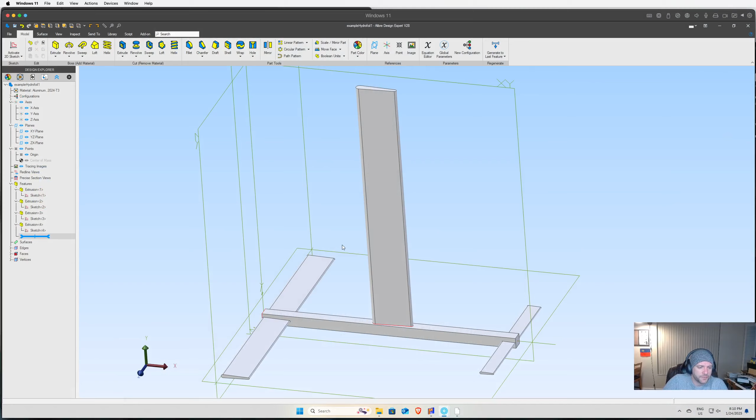All right. So since my last videos, I think I went into a lot of detail of how I would approach calculations. I don't think I want to go through too much detail here, but want to show where I started working with a very simplified hydrofoil. So right here is what I've got. It is incredibly simple geometry. It's a really simple airfoil or hydrofoil for the mast.

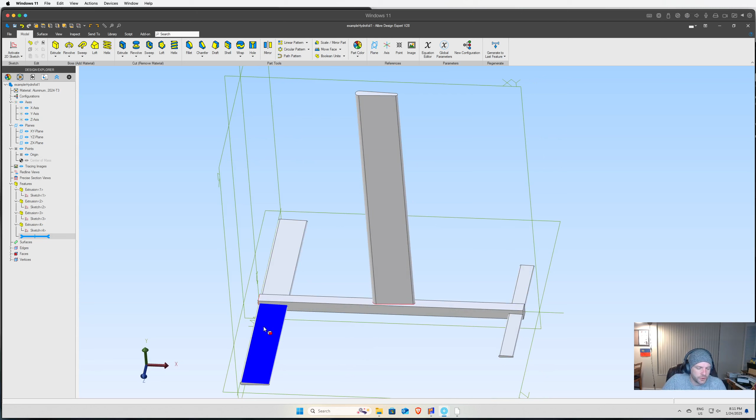3 feet. It's in the dead center of a fuselage, which is also 3 feet long. And wingspan here, we got a meter, and we got roughly half that size here. And this gives you overhead plan area of 1,000 centimeters squared, and this gives you, I think I've set it at 250. And so what I want to do is kind of go over what I explored here.

And so I really started with hand calculations. That's how I like to approach almost any kind of engineering design problem. I want to make sure I understand things. It really helps me get what physically is happening in my head and have some level of expectation of how things are going to behave. And so I put that down in hand calcs.

Then I either see how that works in a finite element program or whatever model I have available. Sometimes I have something built available, but oftentimes in big design problems, it's mostly some kind of computer simulation. But to keep things easy on myself without going to the difficulties of composites and everything so far, I kind of want to get a bigger picture of things. I did assume that this hydrofoil is solid aluminum, the fuselage, the wings, the mast, everything.

Any kind of bending mode I looked at. So I looked at bending modes with beams. I looked at torsional modes of beams, and I also looked at shear modes, but shear didn't seem to matter too much for this problem. All done with aluminum and all analyzed with rectangular shapes that are the average thickness of the airfoil I had, or hydrofoil. I assume it's fixed at the board. I assume that any vibration, there's no added mass from water. I can account for that later.

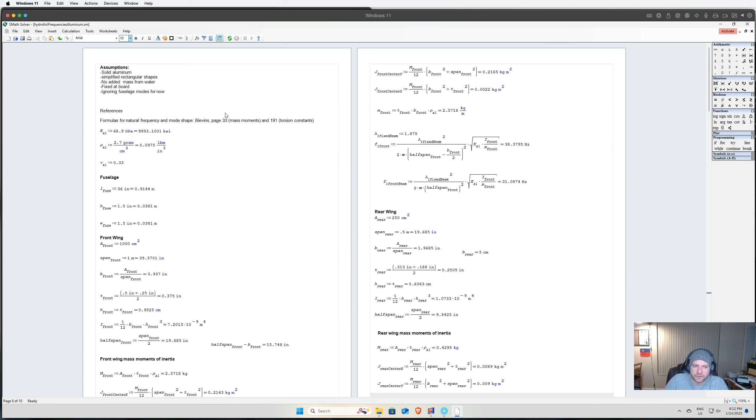And I didn't really look at the fuselage modes too much. I did kind of play around to see if they have an effect, but it seemed to matter more for higher modes. But as you can see, a lot of hand calculations. And what I found out was there are a lot of combined modes for various things. And so I'll go over the models I created. So one is pretty simplified. It's like a tet mesh model.

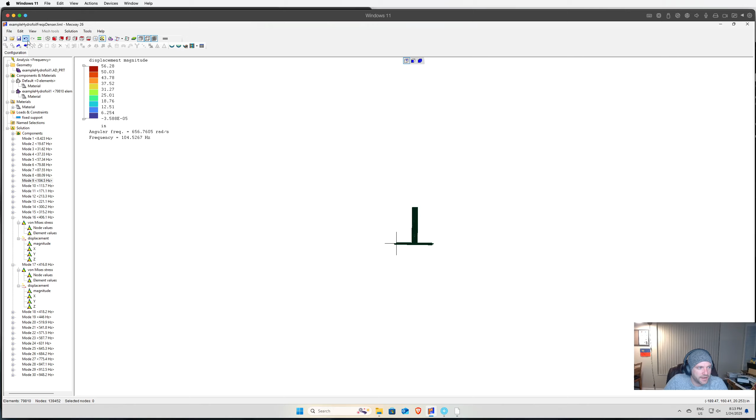It does have the airfoils in there, and sorry I'm zooming it around, but it does have the hydrofoil shape in there that I modeled in CAD. I don't think that's a really good hydrofoil shape, but it was simple to model. I just wanted to get something going, and I looked mainly at these modal shapes. And what you'll see is that this first lowest mode, given the dimensions I had, this is roughly 3/4 of an inch wide at the thickest. I think it's half an inch back here, and so I use the average of those two as the dimension.

Actually, I can measure here with this program. Let me do that real quick to make sure I'm not a liar. I like to make sure I'm correct. So measure from here to here. Actually, so that's an inch across, and so the average is actually 3/4. So it's an inch across. It's half an inch in the back, and so the beam I used was just a rectangular beam to approximate the mode of this.

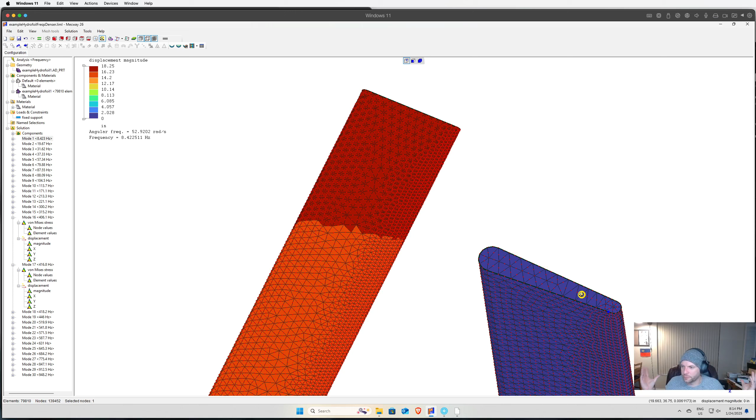But so I did this FEM model or finite element model, and I got this bending mode. You can see here. So that's the first mode I hit, and by hand, this is the easiest one to calculate. I did have to play with some of the inputs a bit. Anytime you do vibration, you do end up needing combined modes, and it's best to not have to do any kind of fudge factors. I don't like fudge factors. It means you don't really know what's going on.

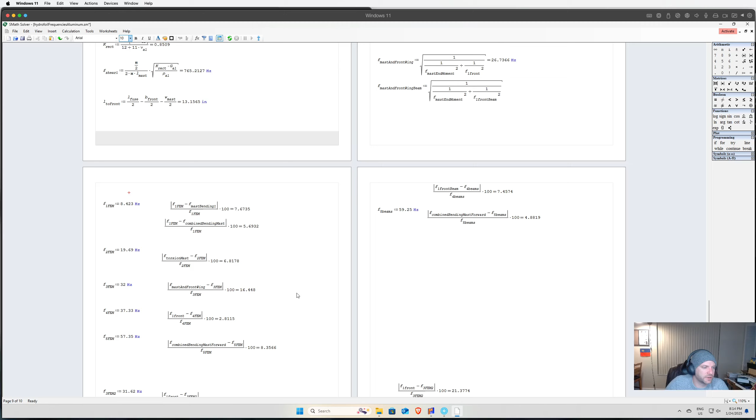But so FEM says 8.423. I think that's what I put in here. 8.423. By hand, oops, sorry, wrong program. By hand, I got a little bit different than that. So the mast bending, what did I get?

9 hertz, like almost 9.1 hertz. And so that's within 8%. And what I also combined there was I combined another mode. Let's see, what was the mode I combined? Combined bending mast. Ugh, I'm having a hard time talking for some reason tonight. There we go, combined bending mast.

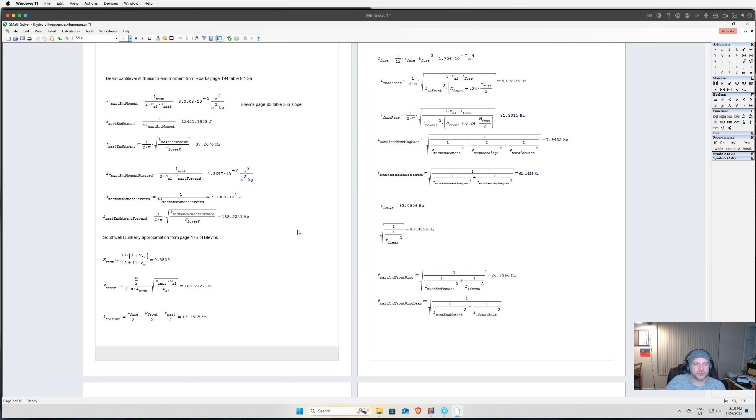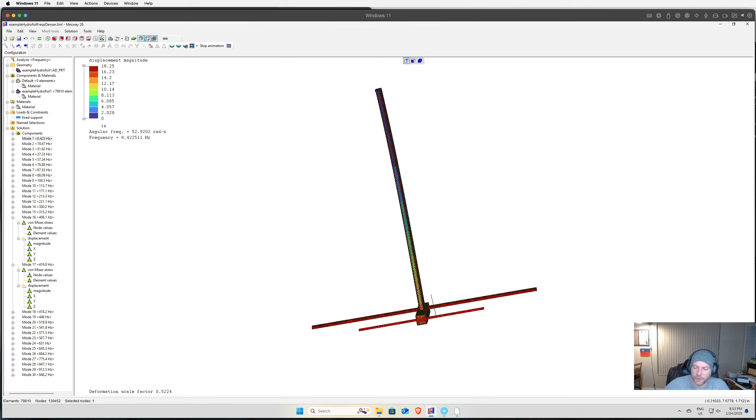So it's actually a combination of not only a bending mode, but a torsional mode or a twisting mode of the shape. So not only do we get the pure bending mode, but there's also this rotation and torquing of this whole moment of inertia of that fuselage and the wings combined. So the mass and everything is causing that mode to drop. And so when I combine those things, so not only the torsional mode, combined bending mast, I combined the mast end moment, which is what that is.

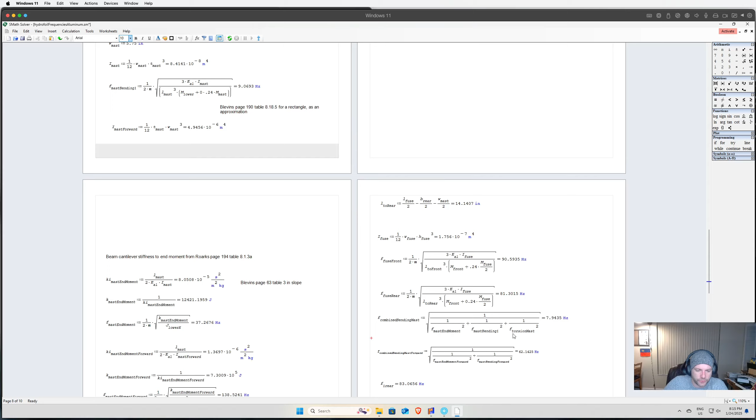I also looked at a slight torsional mode of the mast because it's not a clean side to side shape. You know, if you look at it, there's a slight, let me get dead on top. Let's see, which view do we have? You can see that the front wing has got this slight torsional twist mode to it.

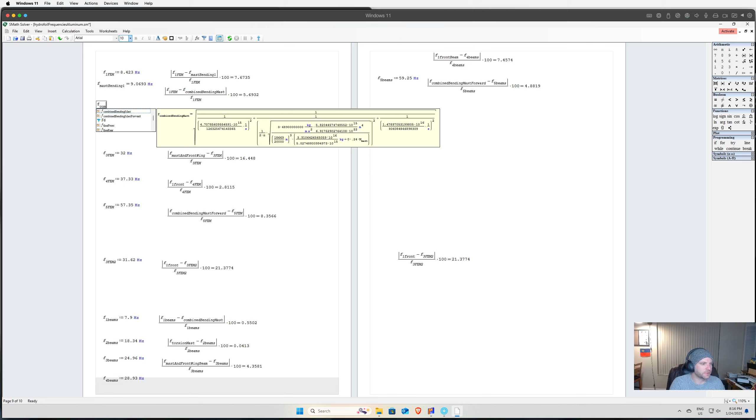So I combined all those modes by hand, and I got within 5.6%, 5.5%, something like that. I say that's pretty good, considering the simplifications I made, just trying to see what was going on. So I got 7.9 hertz by hand. The model was 8.4 hertz. I say that's pretty good.

Second mode, I looked at this one here. So this is a torsion of the mast itself. So this is a lot of just the mast twisting. And I got 19.67 hertz in my finite element model. 19.67, 19.69, depending on the, I was playing with the mesh density a little bit. And by hand I got within 7% of that.

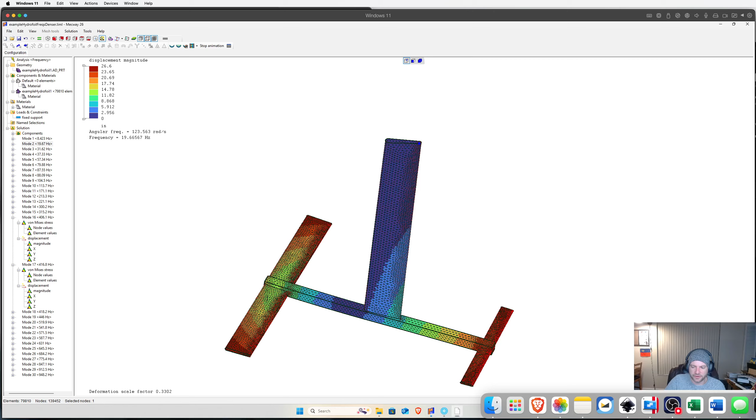So that's pretty good. And the third one, I think, that showed the flapping of the wings, there we go. So there's this flapping of the wings mode, or twisting of the mast itself with the wings. And I don't think this is necessarily one of the first modes you see on a real hydrofoil.

I think we are seeing this because this is a very simplified model. We have this thick piece of aluminum going all the way out for a meter. It's not tapering down, so you have a lot of mass out here, so it's actually causing the fuselage to twist around. And so it's a simplified model. I'm just trying to understand what's going on here. So it's really the combination of the modes of the mast and the front wing wanting to bend together.

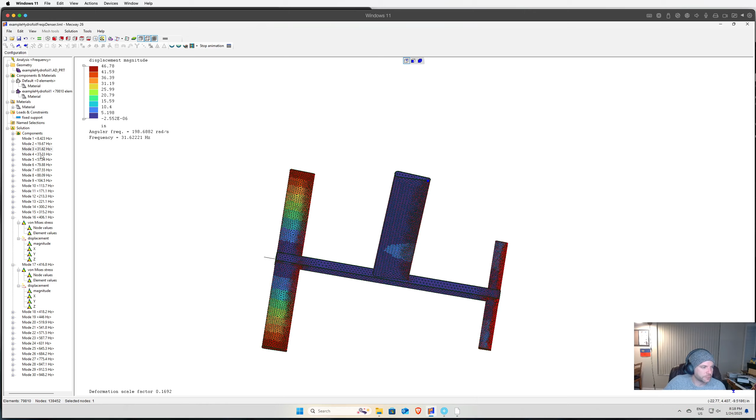And then a little bit of a mode after that is actually more of a pure wing flapping mode, where you get this wing doing this flapping motion. Let's see if I can get a dead-on view here just a little bit.

I like this program. It wasn't that expensive. It's just the navigation and the scrolling for Zoom isn't that great.

But yeah, the other mode is almost a pure wing flapping. So that's 37.3 hertz. And I got by hand within 3% of that. I would say that's pretty good.

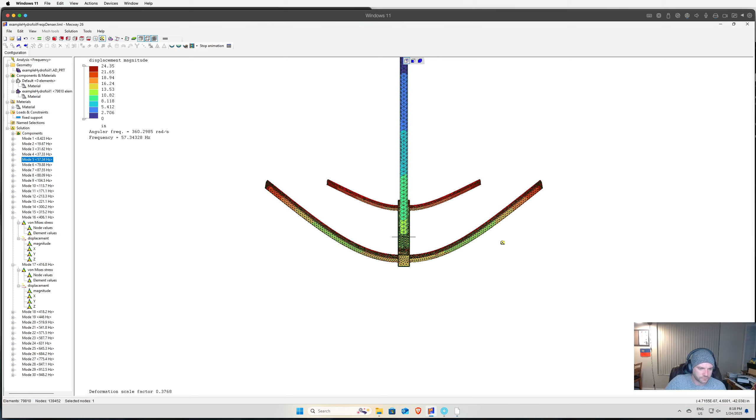And the last one I really bothered with was the fifth mode, where you're starting to get these higher modes where the mast is actually combining this motion with the wings not participating as much. You notice as the mast goes forward, the tips will kind of want to stay where they are, and so you get a rear wing flapping.

You get the mast bending forward, and when I calculate by hand, when I combine these things, I got within like 8.5%. If you look at combining these modes, I say that's pretty good.

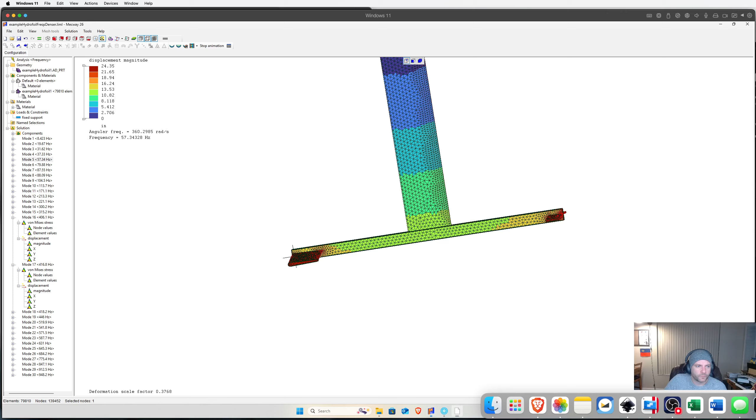Another thing that I did that was, I think, helpful was this model right here. I took a completely stick model of them, and I really like making stick models, and I found out I could actually do it with this program.

I've done it a lot in ANSYS and Abaqus—actually more in Abaqus, but also in Nastran when I was working in the aerospace industry. There are a lot of stick models like this built, where we actually built all the models by hand. So what I did was give this pure rectangular beam properties for the model.

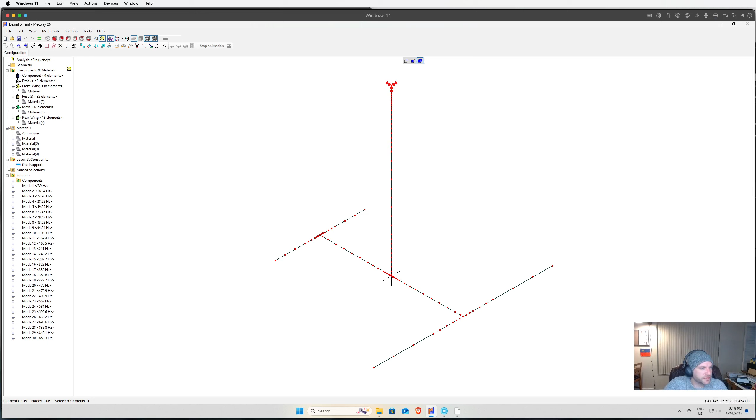Let me see if I can show. There we go—these are the actual simulated shapes. You'll see these are pure rectangles simulating what's going on. They have no airfoil shape whatsoever; they're just the average thickness of the airfoils.

And what that ends up with is, because the real model—oops, let me turn that back off—this connection point at the front wing is dead center of that fuselage. So I did not account for the fact that when you join this right here, the fuselage doesn't extend all the way forward because the node just ends, and the wing actually starts right in the center. So it gets a little higher mode and a little lower mode because the wing's longer—it's attached to that mode. There are things you could do to change this model to make it more accurate in that area, to kind of fudge it, but I didn't bother.

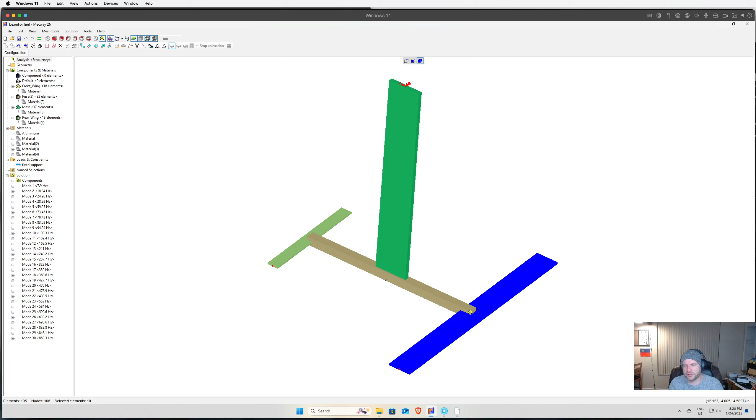I just went ahead and analyzed it. What you'll see is that you get these similar kind of modal effects with similar magnitudes, but they're fundamentally different because you don't have that airfoil shape accounted for in this model.

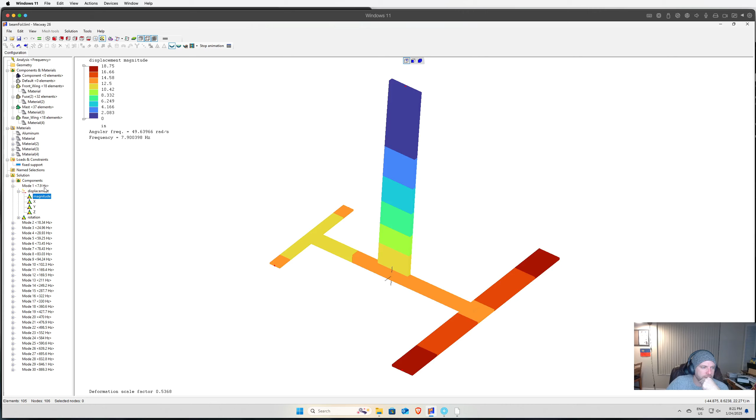So at first mode, 7.9 for the airfoil, I got 8.4. For this beam mode, I got 7.9, and my hand calc was within like 0.5% of that. That's just telling me my hand calc is correct—it's not necessarily saying I have a good representation of physical reality. It's just that my hand calc's correct.

Second mode, we see a similar thing when we do combined effects, like the torsion mode of that mast—you end up with 18.4 hertz. With my hand calc, I got within a really small amount. I was actually amazed how close this got given how simple that torsion calc was—within 0.05%. It was really, really close.

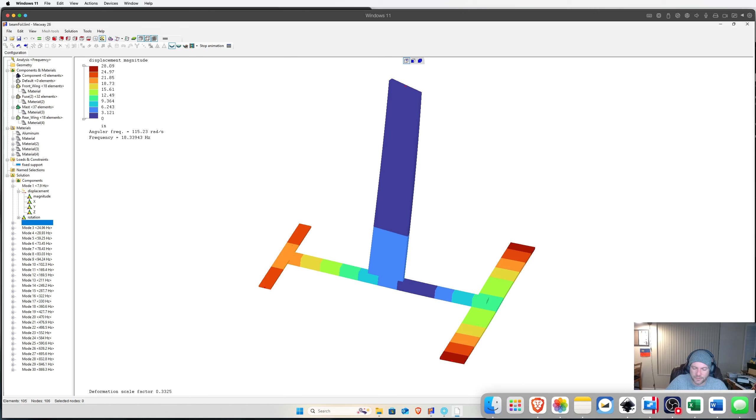Third mode, I'll just go through all these first five modes—was also this combined twisting of the mast, bending from torsion of the fuselage combined with the flapping of the wings, which drops it from the pure flapping mode of the wings. So I got 24.96—was that right? 24.96, just making sure my numbers are right. So I got within 5% of that.

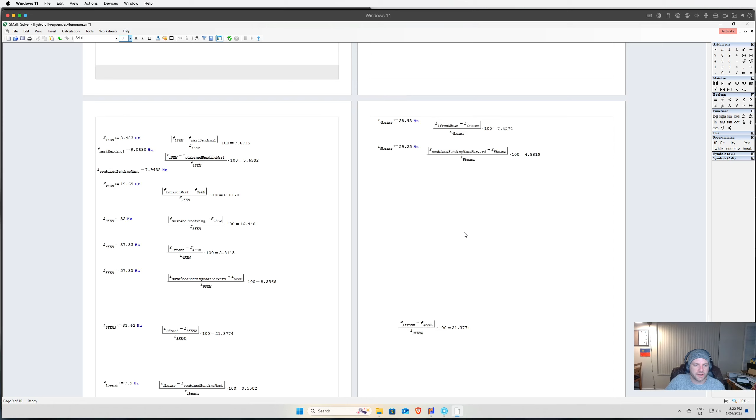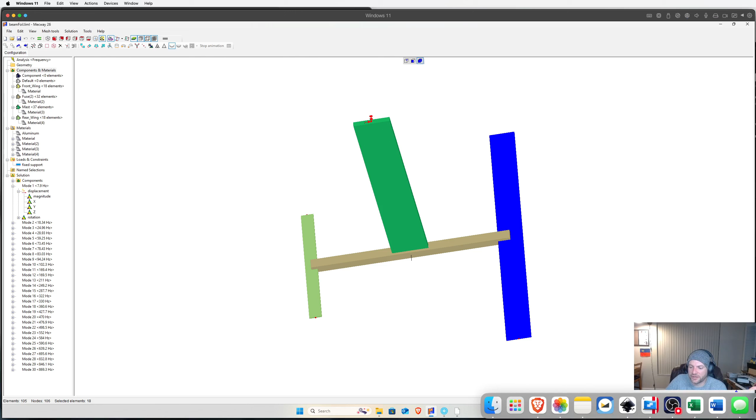That's good. We get a little more divergence when we start getting higher modes because it's harder to understand all the different effects. The pure flapping mode—this is where that model simplification matters, because you don't have the full length of that fuselage here; the node just stops here. So your wing mode is going to be lower in this model than in reality, because you don't get that added stiffness of the attachment if it's really attached. That just depends on how your model compares to reality. But I got 28.93 hertz and was within 7.5%.

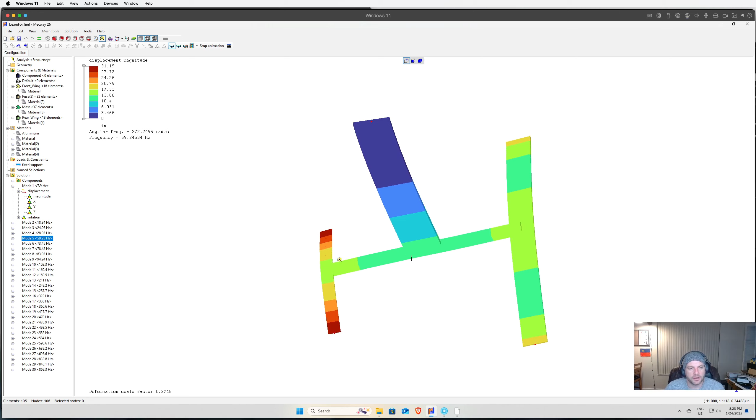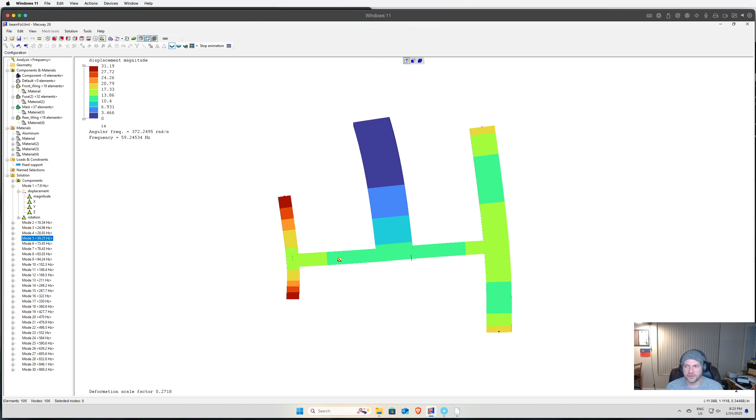And the last one we'll go over is mode 5, where you get this forward bending mode. The modes are very similar between the pure stick model of beams versus the TET mesh. What that's telling me is that with all these things going on—even with this heavy front wing, heavy rear wing, and a completely unoptimized fuselage roughly the size of, say, a starboard IQ foil or a 1,000 centimeter squared wing, a bit bigger than the IQ foil—if you run the analysis with this heavy front wing, your mast mode just dominates. That first bending mode—you can feel that flop too when you hold your mast.

You can bend it by hand. You can feel it flex. So that stiffness there is very important.

And the next one is that torsional mode. I think these would be improved greatly when you account for the fact that you'd get some kind of carbon composite where you get some stiffness without so much weight. So you'd increase the fundamental mode of these a little bit. I don't know how much, I'd have to run the numbers. I didn't do that yet.

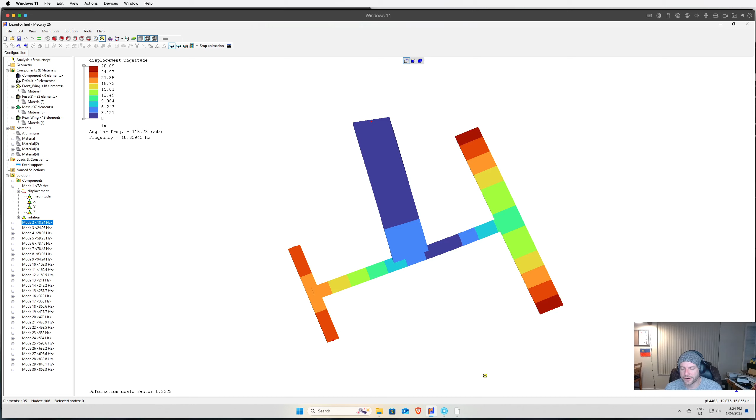But this kind of shows you why mass is so important on these things, especially at the wingtips, because you get all this moment of inertia out at the wingtips. And I had to calculate the moment of inertia of these shapes. They're simple shapes, that's why I kept them simple, just for this demonstration, trying to understand what's going on, which I think is always a good way to start analyzing a problem - just simplify everything to try to understand fundamentally what's going on.

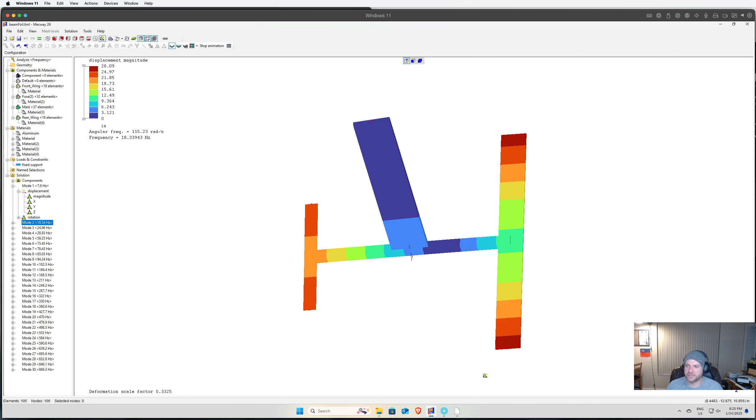I don't expect these modes to be exactly the same at all when you look at a real carbon fiber, stiff, light wing, but this indicates kind of the direction things are going. I also noticed that when you get to these higher modes, you get a rear wing mode, you get a few of those, you start getting twisting, fuselage stiffness matters.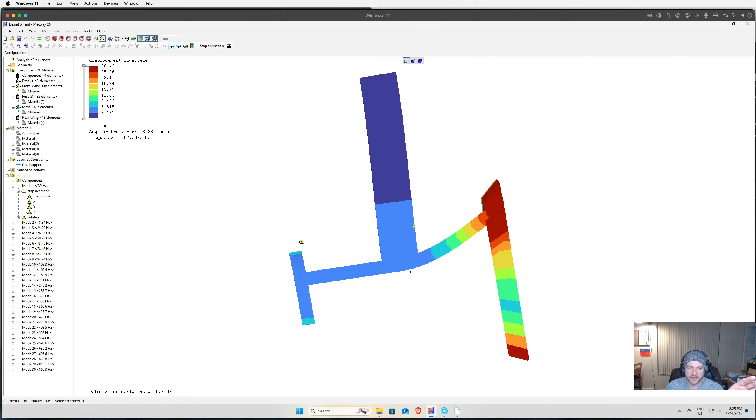But I think - this one, if this is a real mode, I'm not convinced it is because of how heavy the front wing is, but you see that the fuselage is bending up and down. These are the ones where you start to get a crazy interaction with the fluid flow, because in reality it's not going to bend up that much. It's going to bend a much smaller angle.

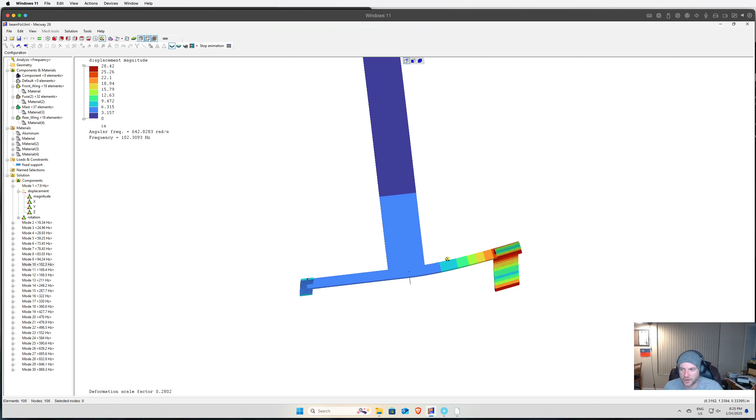This is exaggerated. But with this bending up and down, you're going to start getting this effect where the flow over this starts changing. So when it bends up, it's going to increase the angle of attack of that front wing and push it up further. Then it's going to snap back down, and bend downward, and get this angle of attack pushing opposite of lift. And what you get is this flutter situation, or an aeroelastic effect where your deflections of your foil start interacting with the fluid, and it causes bad things to happen.

They test airplanes for this. Control surfaces have a problem, but I don't know how huge this effect is on hydrofoils. I know it's a potential effect. I don't know how significant it is for real hydrofoil design, I just know it's there. I just know it's something you could potentially run into if you're moving very fast in the water and you have a fuselage, mast and wing system that isn't stiff enough.

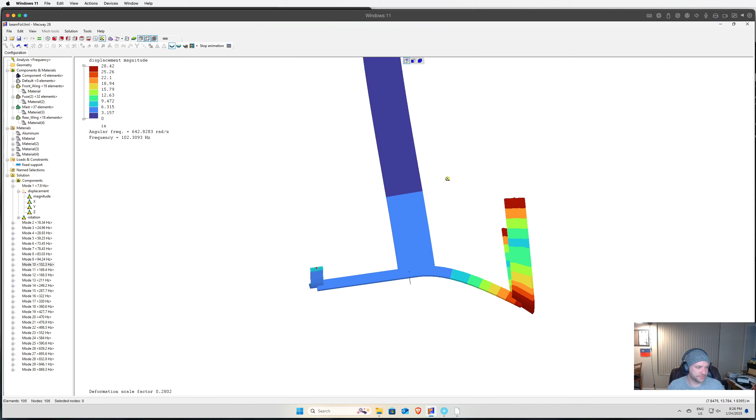And it also happens with, maybe not that one, just rear wing effect. I think it was around mode 15. Yeah, that's not quite what I was thinking about. Where you get a torsional mode.

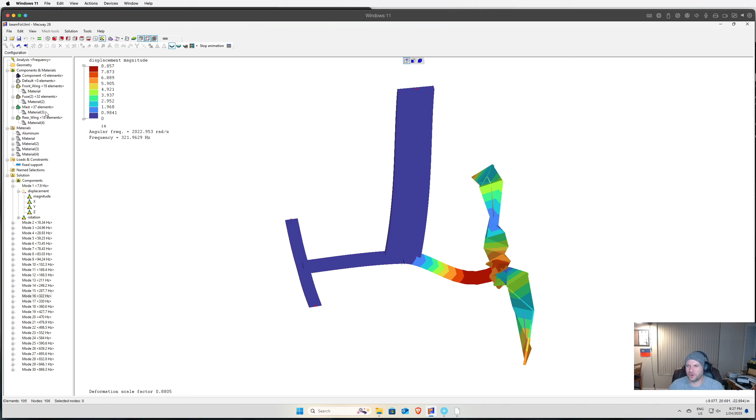Okay, this one - this looks really ugly because there's a twisting effect going on with this wing, and I think you actually see it better with the actual mesh of the TETs, because this model is pure beam, so it looks kind of silly. It doesn't really animate that well. But when you look at the TET mesh model, similar mode, you get down to mode 14, 15, these higher mode shapes.

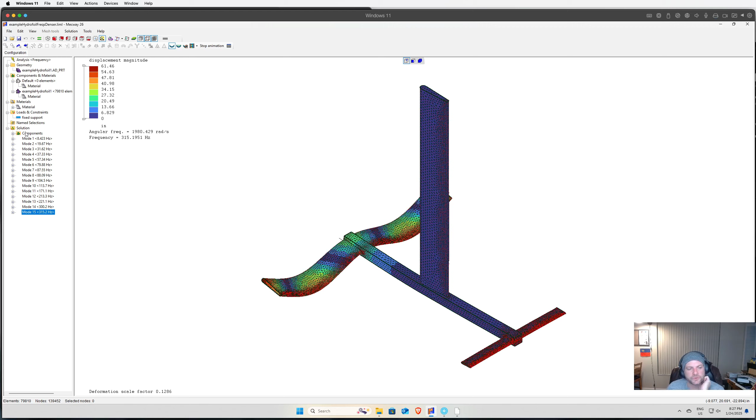Yeah, it's always interesting to see it dance. Maybe I don't know if I have the results saved with that 16th mode, but you do start seeing this more torsional effect in the higher modes. And I think that's more where you get the classical aeroelastic effects of these things interacting with the fluid flow. Or maybe this is the twisting effect, maybe that is the mode we're seeing.

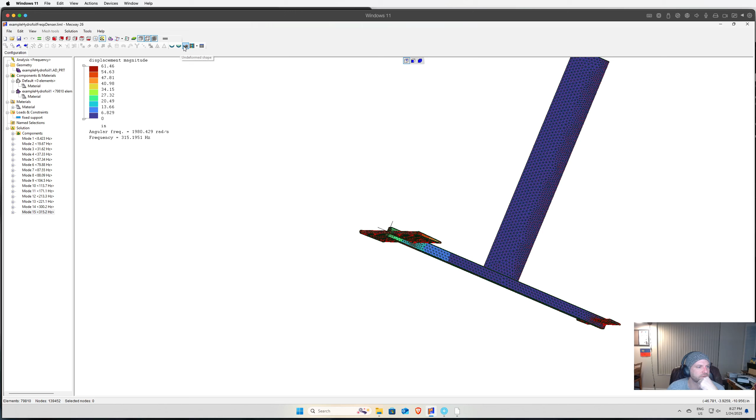Yep, that's the bending fuselage, so you can see the wing twisting. Obviously this scale is exaggerated. I could stop this and kind of look at - let's see here, let's look at a scale. So the scale factor is 0.1, so let's make it 0.05.

Let's give it half that scale. And we'll reanimate that. There we go.

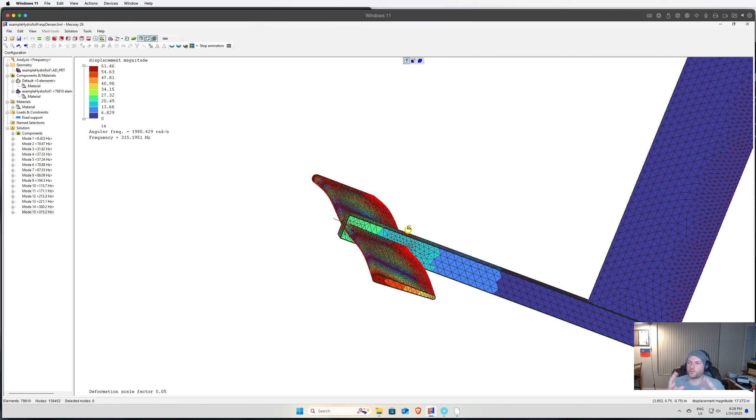I changed the scale because that's completely under my control. The thing about modal shapes is this is purely the direction of the shape, what the shape looks like. It doesn't tell you anything about the magnitude, because I'm not forcing this vibration with a certain force. It's just the shape it's going to want to assume given this frequency.

But you can see the twisting of that front wing with the fuselage, and that is where you get that interaction with the water flow over this.

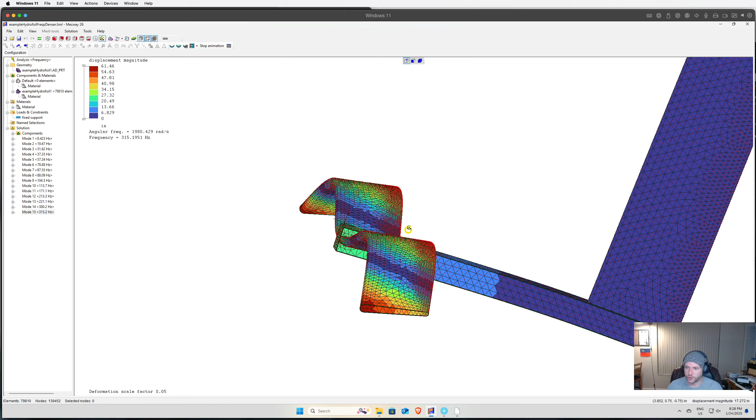So that's where I got with the mechanical look at this model. I think you could also look at the stresses, but I'm not too bogged down in that right now. I'll probably check it at some point, but I really think the stiffness of the fuselage, the wing, and the mast completely dominate the equation. If you make these stiff enough, they're probably strong enough to survive.

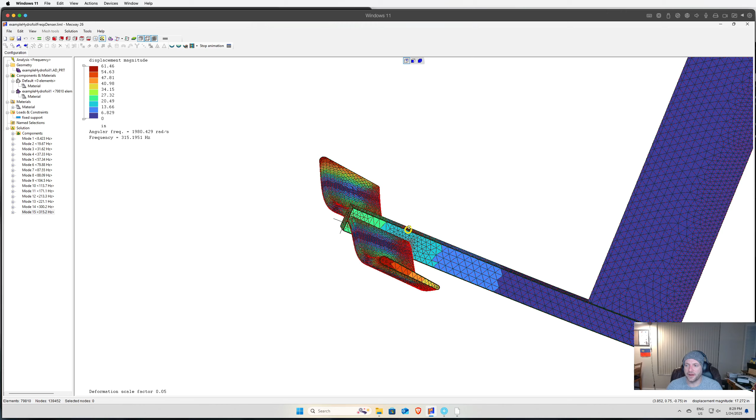Now where that's not the case is the connections, like the mast to the fuselage, or the fuselage to the front and rear wing. That's when you really need to know the loads, whether the fasteners will work right, if the load is passing through at the joints, where the joint design becomes important. That really starts to matter.

But for the gross deformation of things, stiffness just dominates the equation. Are you even in the right ballpark of this thing? You need to solve the stiffness problem first. That's almost always the case, unless you're sizing something like a lifting feature where it has to be a certain strength, and strength determines things.

For functionality of mechanical components, it's almost always stiffness. Like cars, you worry about the stiffness of the suspension, the springs, the engines. Strength does matter, but you have to look at both. You can't just look at strength.

So I didn't look at the stresses of this. Mode shapes don't tell me anything about stresses right now. I think it's going to be fine, but I will check it at some point in case you're wondering about that.

I went through, got hand calculations, and did some finite element runs with this finite element program I got. It's just the mechanical side of things, because I'm more familiar with mechanical. I'm comfortable with it, so I'm going to approach it that way.

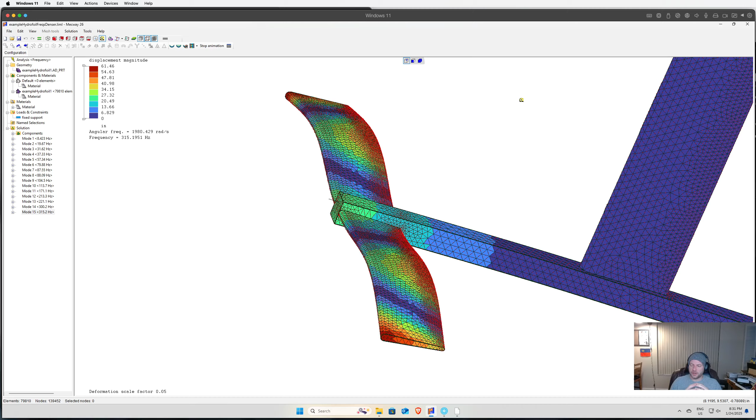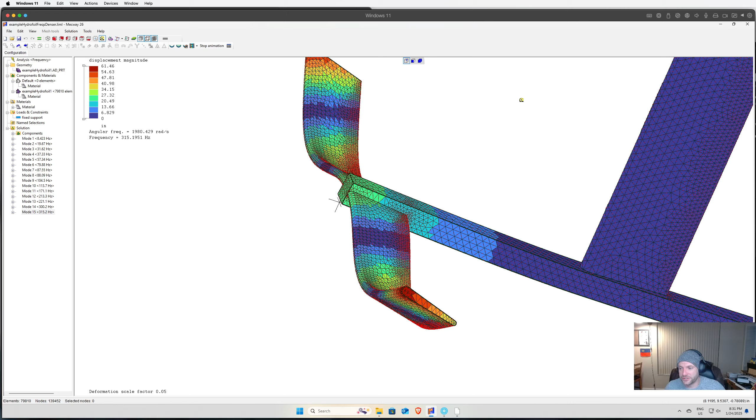I want to approach that next, and convey that anytime you come into a mechanical design problem, it's good to have a holistic understanding of all the effects. That's very contrary to what happens in a lot of industry, where you have a stress guy, a finite element guy, an analyst guy, a fluids guy, a thermal guy, a vibrations guy. But to solve a real design problem, when you're forging new ground and new territory, you need to understand the bigger picture. I really like to make sure I understand that, and I hope you do too.

But that's what I just wanted to show here. I think that's all I've got to talk about today, and I hope you enjoyed this, and hopefully see you later.